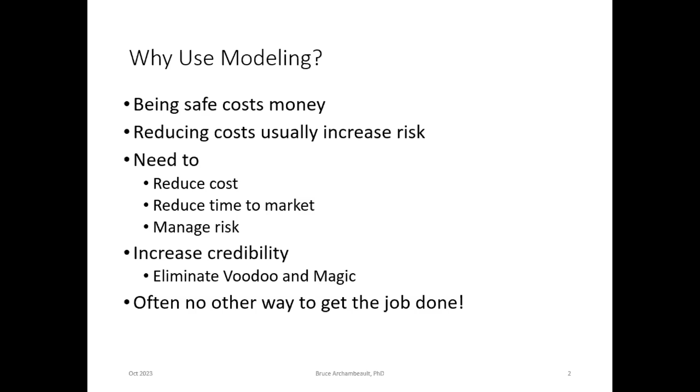Each tool is based on some modeling technique. And the modeling technique basically solves Maxwell's equations. And the way they do it varies. And that means the ability of the tool to model everything is impossible. Some tools are really good at long wires. Some tools are really bad with long wires. Some tools are good with shielding. Some tools are bad with shielding. So we're going to go through and talk about some of the different modeling techniques here in a moment.

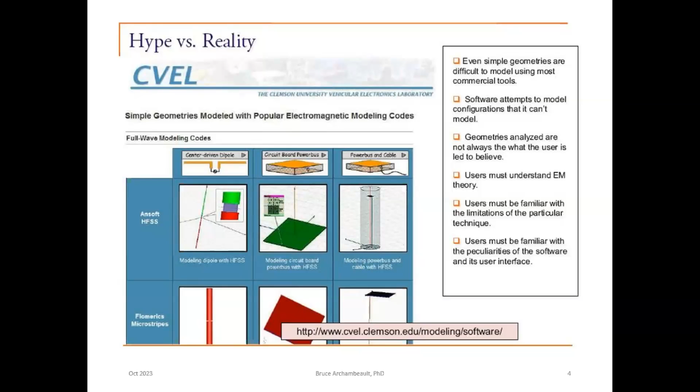So modeling is here now, and I think that if you go to the symposium, the EMC Symposium, you'll find multiple sessions on just modeling, as well as problems that have been solved by using modeling. But they can't do everything. The CAD file has too much information to be able to model everything. So you can't just download a mechanical CAD file and an electrical CAD file and hit the button and say, go model. You have to break it down into what problem you're really trying to solve.

And the old saying about garbage in gives you garbage out applies to simulations like it applies to most things. So you have to be very careful in what you're simulating. But modeling can do some things. It can eliminate using out-of-context equations. It can help you update rules of thumb.

It's particularly good at looking at a design feature and doing a what-if analysis. What if I make this longer? What if I move it to here? What if I make the holes in the shield larger, but the metal thicker? All those kinds of things can be solved. And basically, the individual problems can be combined to find the overall result.

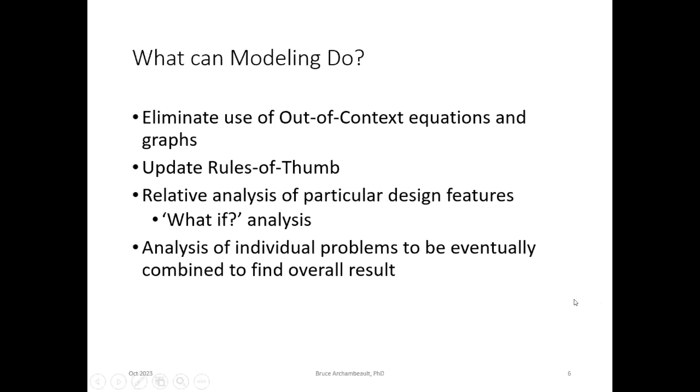But as I said earlier, there's no one modeling technique that'll do everything. And so remember what the vendor's goal is. The vendor's primary goal is not to solve your problem, it's to sell software. So you have to be careful with what they claim or what they don't say. And that's why I think it's important to understand how the simulation tools work. So there's a variety of modeling techniques. I'll talk a little bit about quasi-static tools that just do inductance, capacitance, and resistance extraction. But I'm going to focus mostly on full wave techniques.

And I put magic in here because I actually had a vendor once, when I asked them how their software worked, tell me that it was proprietary and they couldn't tell me. Well, Maxwell's equations are not proprietary. And as far as I'm concerned, if they can't tell me how it works, I won't know when it doesn't work. And so I have no patience for anybody who won't tell me how the software works.

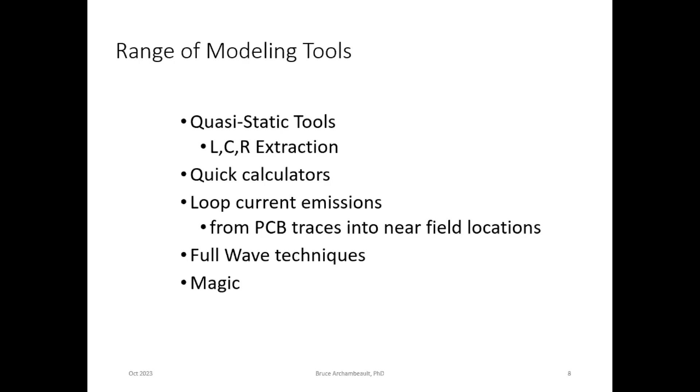So quasi-static models are typically for very small elements, usually a 20th of a wavelength. It helps you make a lumped circuit approximation. And as I said earlier, it's good for LRC extraction. Usually used in signal integrity tools, but it can be used in simulation tools as well for EMC. The problem is less complex, so the equations are less complex and give you an answer quickly. But the key is it has to be small compared to a wavelength.

It assumes that there's no propagation delay, which is not true, of course. But if you have parts that are very close together, much less than a wavelength, very small, then these LRC extraction tools are very useful. So the quasi-static simplified equations give you more efficient codes, so you get answers faster. That's really what it comes down to. They're usually written to complement a circuit modeling tool such as SPICE or something similar to that.

But it has its disadvantages, like all the simulation tools do. It is important that you ensure the problem meets the criteria for a quasi-static solution. That is, all the dimensions must be electrically small because it's assumed that there's no propagation delay. And this is becoming very difficult with the frequencies of concern getting higher and higher. For example, for a 3-centimeter backplane high-speed connector, quasi-static is only accurate to less than about 5 gigahertz. So you can imagine at 30 centimeters that it's going to be accurate only to 500 megahertz or so.

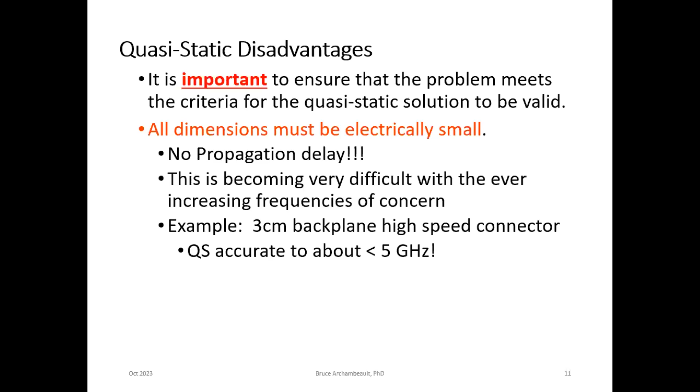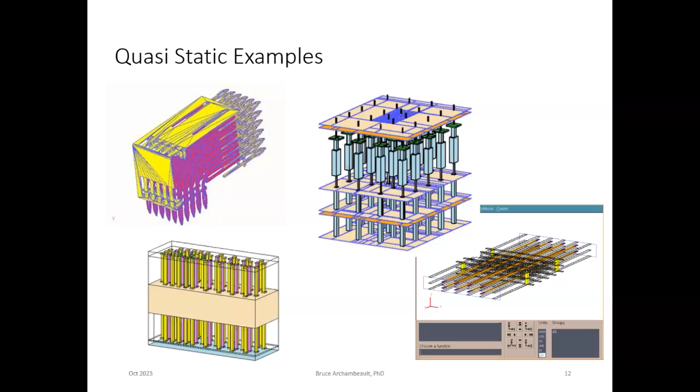So here's some examples of some quasi-static models that I've seen in the past. They're all connectors, and you can see how the parts are very close together. And at the frequencies that were being simulated, these were very small compared to wavelength.

Now, there's a number of different modeling techniques: the finite difference time domain, the method of moments, the partial element equivalent circuit technique, transmission line method, and finite element method. And there are others, but they tend to be university graduate students' tools and don't get propagated out to people. I'm going to focus on the most popular ones, which is FDTD, the method of moments, and the finite element method.

Now, the good news is you don't need a PhD to use them. You can get codes from many places. You can get them free from universities, but the buyer has to be aware, or the user has to be aware, because this was developed by a graduate student, and the primary goal of that graduate student was to graduate, and they're gone. And so there's probably no manual, or the manual is very weak. So you have to be very careful.

You can purchase the software, of course, which is what most people do. But again, the user has to be careful to make sure that the simulation technique will do the kind of problems that they want. So I think that users need to understand the basic techniques and their limitations. Each technique has an area where it excels, and areas where it has limitations. So oftentimes different modeling tasks are going to require different modeling techniques.

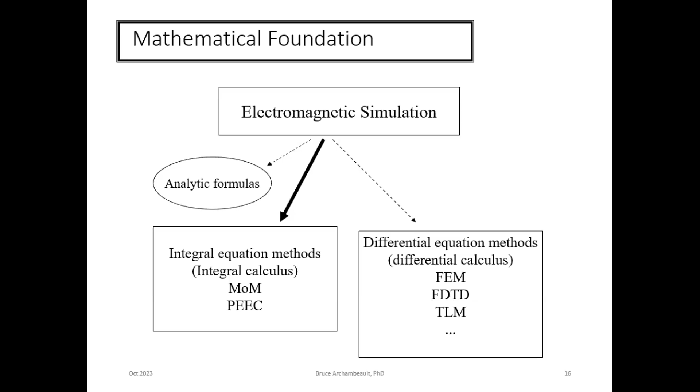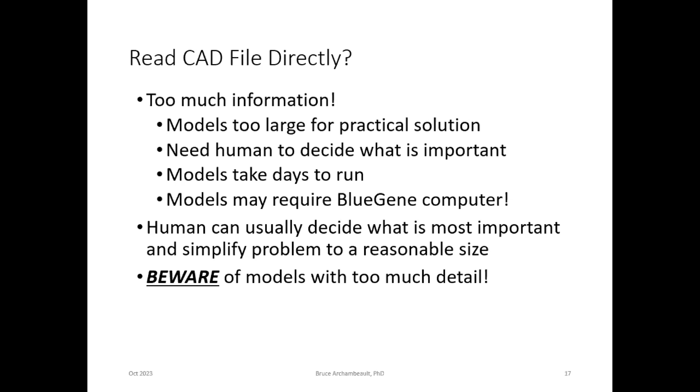So a lot of tools will read a CAD file, and I'm very nervous about that because there's too much information. And so the models tend to become very large for a practical solution. So the human, the engineer, needs to decide what's important. Sometimes models can take days to run. If there's too much information, you might need something like a Blue Gene computer or some kind of supercomputer to run it, which is not practical for most of us. The human needs to decide what's the most important and simplify the problem down to a reasonable size. You need to be careful about models that have too much detail.

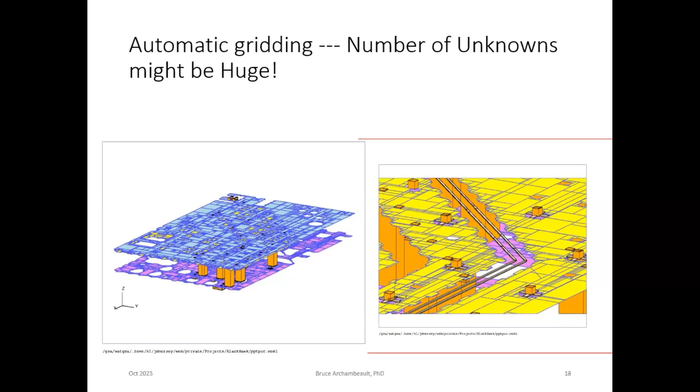But when you look at it, you can probably simplify some of the things easily enough. The reference plane that's on the side of the differential traces has, I don't know, protrusions in it. That may or may not be important. You could always run two models, one with the larger size and then the smaller size. And if it's not much different, then you've got a good answer.

All right, the finite difference time domain technique is a simple technique. You have to grid up all of the space, and the fields are assumed to be constant over a cell. So imagine a room that you wanted to simulate something in. You would make all these little square boxes that fill up the room. Each box has to be denoted as air or metal or dielectric or some kind of magnetic material. And it's a time domain technique, which means that you get a wide band of frequencies all at once. And then you can get frequency domain just by doing an FFT.

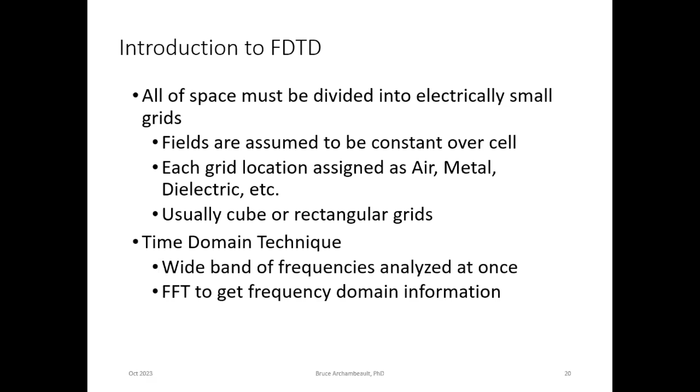So Maxwell's equations in differential form look like this. We're not going to spend a lot of time on Maxwell's equations, but basically on the left-hand side, in one dimension, it's saying that there's a difference in the electric or the magnetic fields across a small area of space. By the way, when I say small, I always mean smaller than a wavelength. And for EMC purposes, 1/10 of a wavelength is usually good enough. And that's equal to a time varying change in the electric or magnetic flux. The J term is conduction current. So in the air, we don't have any conduction current unless we have lightning or something.

By the way, the minus sign that's on the lower equation means that the wave will propagate, and light is just an electromagnetic wave. So you can tell your significant other that without the minus sign in Maxwell's equations, you couldn't see anything because it would be dark. And they'll be quite convinced that you're a nerd.

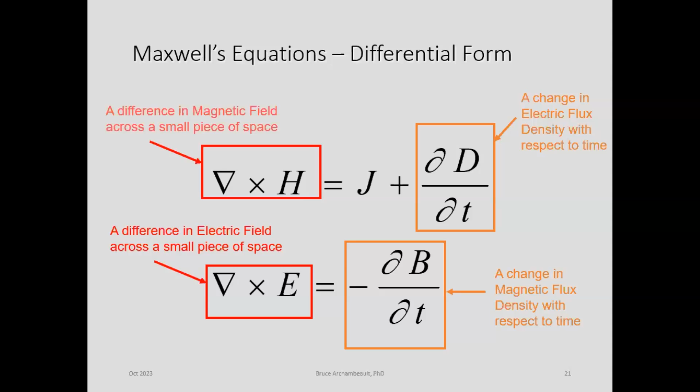Well, we take the equation and we convert it to central difference. So basically the lower equation is saying at a certain time, the change in the field from one cell to another cell over the size of the cell is equal to the change in time of the magnetic field over the delta time. And of course, we have to put in the constants, in this case mu, to make all the units come out right.

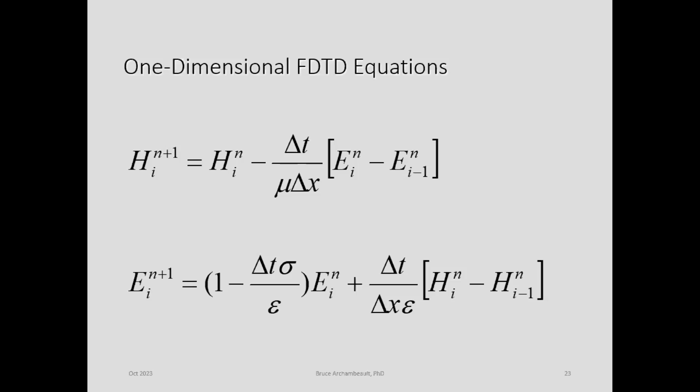And so here's the two equations for FDTD. And basically, it's just time stepping. So you've got a bunch of cells, and you go through and calculate the electric field for each cell. And for each cell, the electric field is based on the old electric field and the difference in the magnetic fields on either side of it.

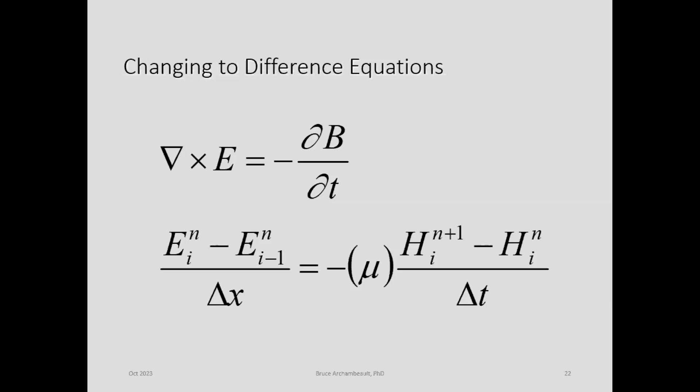So coming back here, if I was to rearrange the lower equation, then looking at H at n plus 1, that's the new time. So the old H, which is H superscript n, is going to be on the other side of the equation. And on the E field the i's are changing, so that's position. So on either side of the cell we're calculating, we're finding the difference in the E field and the old H field, and that gives us the new H field. So this just says the same thing I just said.

So in 1 dimension, you can see the E fields are shown there, and the H fields are in between the E fields. They would normally be a cell, but I'm just showing a line here. And basically, you set a source, and the source then finds the H fields on either side of it, and the H fields on either side of it are going to be due to the old H field and a difference in the E fields, and so forth. And that just marches on.

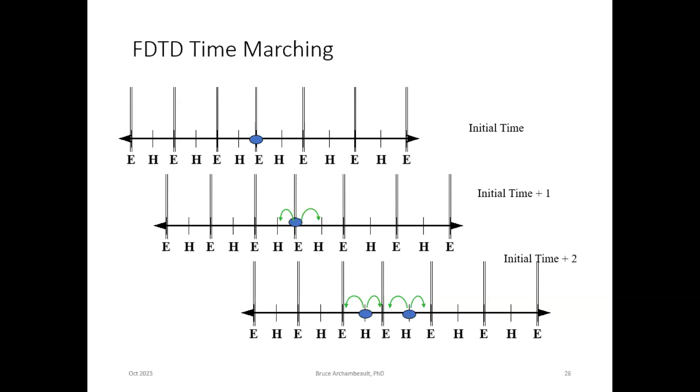And so computers are really good at this, because this is really nothing more than accounting and counting. So we find the E fields everywhere, then we go back and find the H fields everywhere, and then we're done. Eventually, we have to make time go on, and then when everything is done, we've finally got the answer.

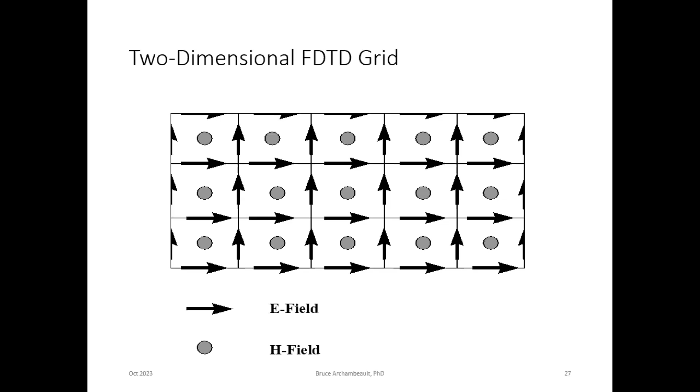A two-dimensional grid adds an extra E field in this case. So an H field, one of the dots, is equal to the old H field and the difference in the E fields on either side of it, as well as above and below it. And you just go through and find the E fields everywhere, and then find the H fields everywhere, increment time, and go on. So for two-dimensional FDTD, you can use either two electric fields or two magnetic fields.

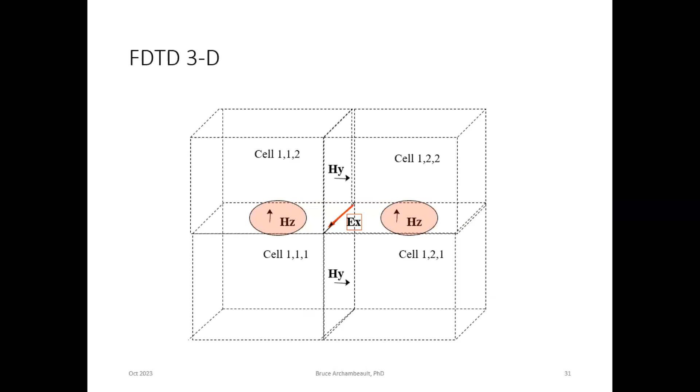And finally, the three-dimensional grid, which is what we really work with: the E fields are along the cell's edges, and the H fields are in the planes. And so if I wanted to find EX, for example, in the place it's highlighted in red, I'm going to take the old EX and the difference in the HZ fields on either side of it, and the difference in the HY fields on either side of it.

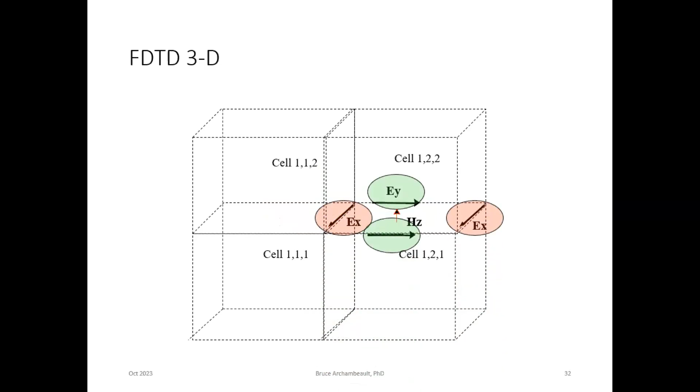And if I wanted to find HZ, it's going to be equal to the old HZ and the difference in EX on either side of it, and the difference in EY on either side of it. And again, we just march through, find all the EXs, then all the EYs, and all the EZs, and then all the HXs, HYs, and HZs. And then we do it again with time incremented.

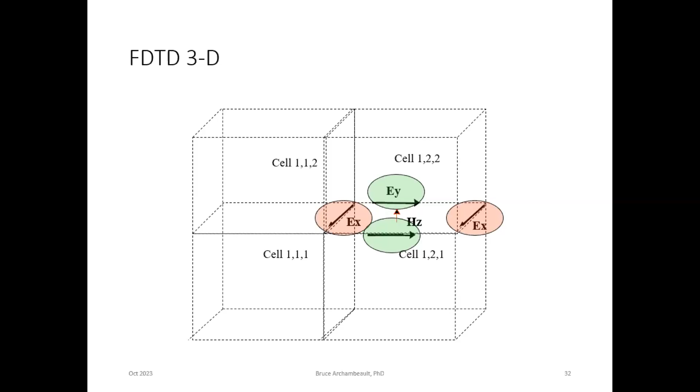So as I said earlier, we have to assign each cell as either a perfect electrical conductor, some sort of metal, a dielectric, or a magnetic material. So we have to know epsilon, mu, and sigma. FDTD will give you outputs. Basically, they're perfect receive antennas. They receive both the E and the H fields no matter what direction they're coming from. And the X, Y, and Z components are found individually as well.

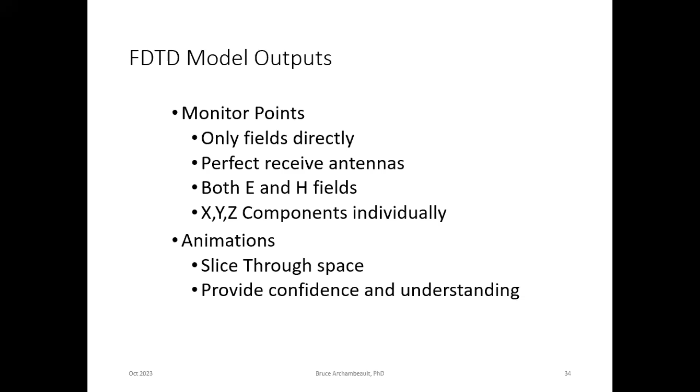The nice thing about FDTD is that you can get animations. Since it's a time domain simulation, you can see how the fields are propagating through your model. And that gives you a lot of insight into whether or not the model's working right.

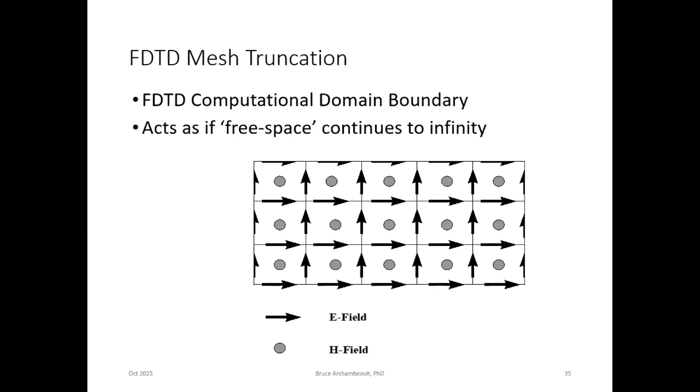We have to be able to stop the mesh at some point. And basically there are different kinds of techniques that allow us to find the fields at the boundaries. Most of them require far field conditions, so the impedance of the E and H fields is well known in the far field. Basically 120 pi, or 377.

So there's also something called the perfectly matched layer, which basically adds more cells. So if I have a computational domain that's, say, 100 cells by 100 cells by 100 cells, I'm going to add, for the perfectly matched layer, some number of cells. And I've heard numbers from vendors of 8 and 16. The more cells you do, the more accurate it is.

And it works very similar to the absorbing material in an anechoic room. It basically has loss in these extra cells, and losses both in the E and the H field. So by the time it gets to the end, it's all gone.

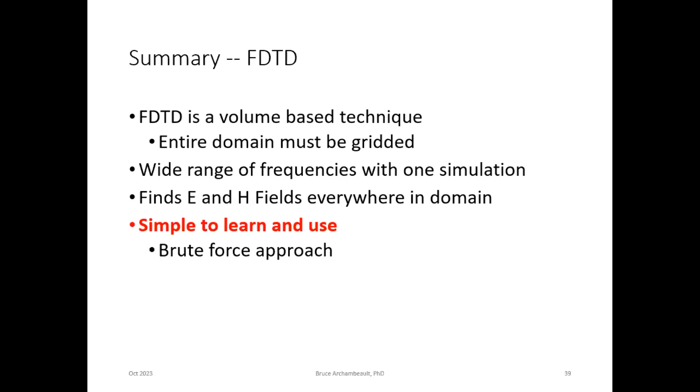So basically, FDTD is a volume-based technique where all the domain has to be gridded up. You get a wide range of frequencies with one simulation. You find the E and the H fields everywhere, and it's very simple to learn and use. It's kind of a brute force approach. It's probably not very elegant, but it works really well. And when you're just starting out with modeling, oftentimes FDTD is the choice because it's so simple to use and simple to know when you're making a mistake.

So it's very well suited to shielding problems with dielectrics and lossy materials, because we're defining epsilon and mu. It allows infinite planes, so you can run a metal plane right up into the boundary condition, and there's no leakage around the plane.

It's not well suited to problems with long wires because I have to have a lot of what they call white cells around it for the boundary conditions to work properly. And it's very sensitive to resonances. So it's very good for shielding. It's not so good for long wires.

Okay, the method of moments is next. We're going to break all the surfaces into electrically small patches, and the wires get broken into small segments. And basically, these small patches and segments are small compared to a wavelength. Again, 1/10 of a wavelength is usually good. Method of moments is a frequency domain technique, so you have to run the model for each harmonic frequency.

Oftentimes, if you have a tool that does method of moments, it's going to allow you to set a start and stop frequency and a step size in frequency. And so you don't have to literally go and run it for each frequency that you want.

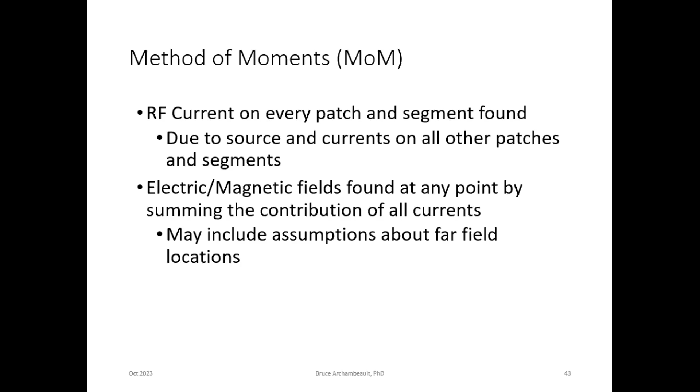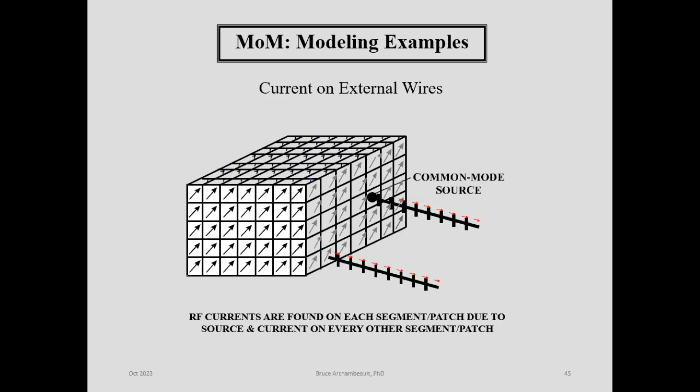So an example here is a shielded box with some wires coming out of it, and the source is labeled there as common mode source, that we're driving one of the wires, and the little arrows denote the currents on the box and on the wires. And so the fields are going to be found by summing the contribution of all the different cells or patches to one observation point, and then you know what the answer is at that point.

And so it's not as accurate as reality. The piecewise sinusoidal is a bunch of sine waves that you put together, and now I've got a nice smoothly varying current. But of course, the more complicated the basis function is, the more it costs in calculation time and memory.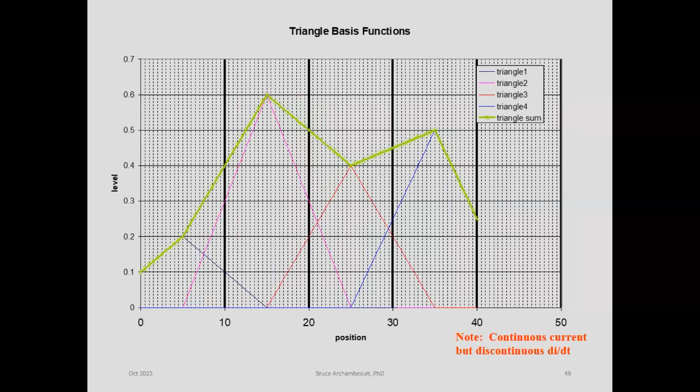Okay, I kind of showed this already. I'm just showing the individuals.

So as I said, the simplest basis function just needs one calculation per grid, but you need more grids per wavelength to correctly estimate the currents. The more complex basis functions require more calculations per grid, but less grids per wavelength. So it's a trade-off. Usually you don't get to pick. Usually the vendor has decided what they think is the best, and you have no choice but to go with what they have.

So the method of moments is a surface-based technique, frequency domain. So the simulation has to be repeated for each harmonic frequency. The currents are found everywhere on all the patches and wire segments, and then the fields are found from those currents. It's very good for wire and surface structures, and it's simple to learn and use, just like FDTD.

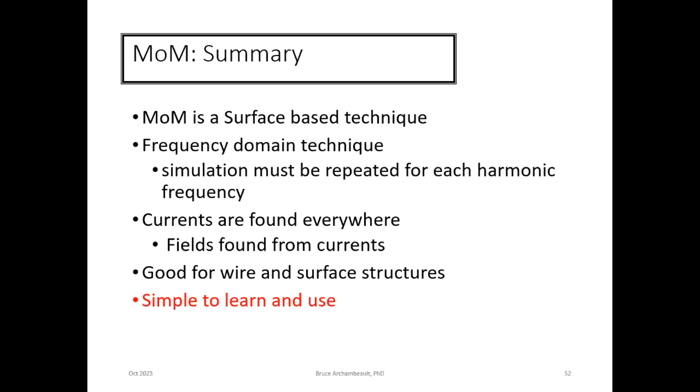It's very well suited to problems with long wires because there's no white space required. It's even well suited to problems with large distances. If I wanted to use FDTD and do a simulation that goes out 10 meters, I've got to make all that area in between the receive antenna and the EUT as cells. So that's a lot of empty cells for nothing. So large distances is problematic with FDTD, but with the method of moments, it's just a simple equation that you put the distance into,

and it's very straightforward. But it's not suited to problems with shielding or dielectrics or lossy materials. You can force it to do these things, but it takes kind of an expert user.

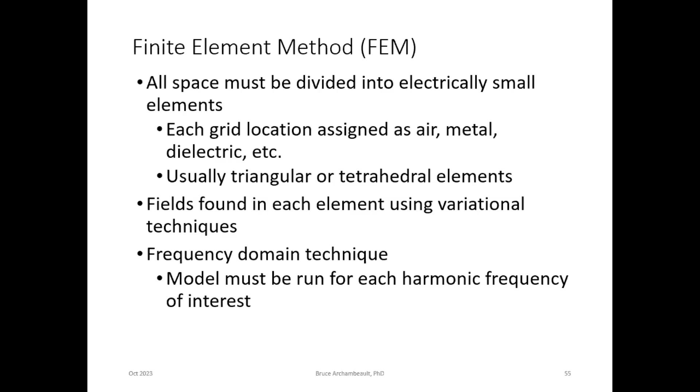And finally, for the modeling techniques, the finite element method, again, it's a volume-based method, so all the space has to be divided to electrically small elements. You define the grid location as air, metal, dielectric. Usually they use triangular tetrahedral elements, and the fields are found in each element using variational techniques, which I'm not going to get into too much here. Just like the method of moments, it's a frequency domain technique, so we have to run the model for each harmonic frequency we're interested in.

But it's good for problems with irregular geometries or curved surfaces and so forth. It can handle different materials very well, and it results in what's called a sparse matrix, which can be solved very efficiently with efficient storage. So the method of moments creates a very full matrix. The finite element method creates a sparse matrix.

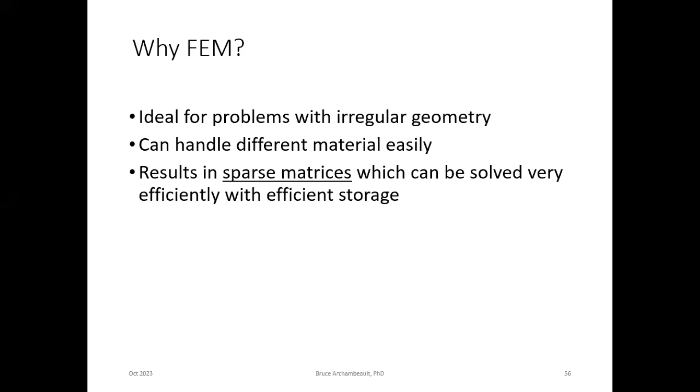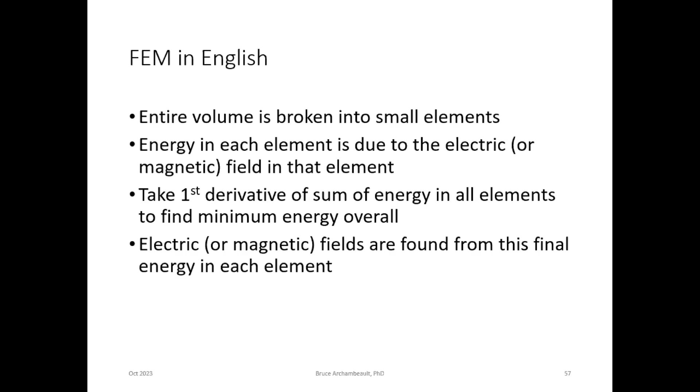So basically the way the FEM works is the entire volume is broken into small elements, as I said. The energy in each element is found due to the electric or magnetic field in an element. And then they take the first derivative of the sum of the energy in all the elements to find the minimum energy overall. And once you find that, you have the correct solution. And this is all done by the computer, of course. And then once you know what the currents are on each of the triangular cells, you can find the electric and magnetic fields.

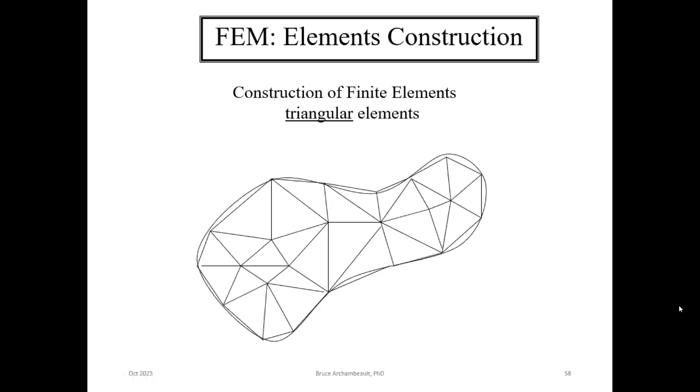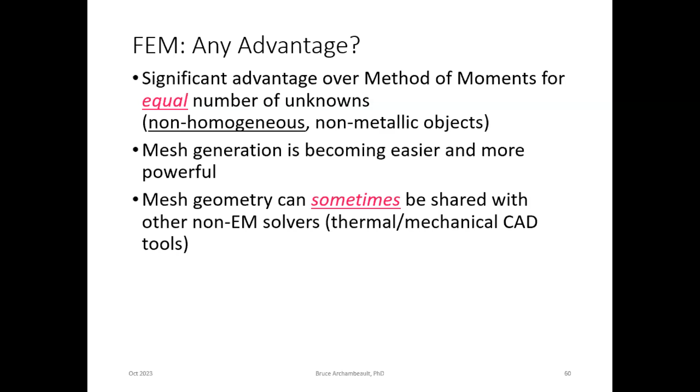The mesh generation, you can't do that by hand. It's too complicated. But there are tools usually built into the finite element simulation tool that do the meshing for you. And sometimes you can share the geometry with non-EM solvers, but I've yet to see that done successfully.

So again, finite element method is a volume-based technique where the entire domain has to be meshed. It's frequency domain, so that means a single simulation for one frequency. Time domain finite element method is not widely available. I know it's at universities, and I heard that there was a vendor that was selling it, but I haven't seen it actually work.

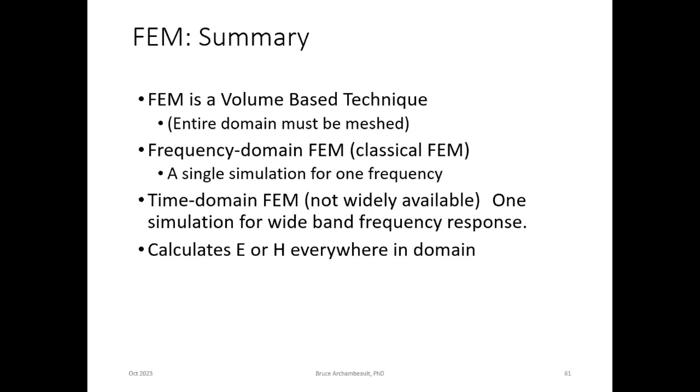So it's very well suited to bound problems like waveguides, resonant cavities, and so forth, and very well suited to problems with large size differences within the model. For example, a microstrip that's only 10 mils above the ground plane, but you want to find the fields inside a box or something, and the 10 mils requires very small cells, but you can make them larger as long as they're still small compared to a wavelength.

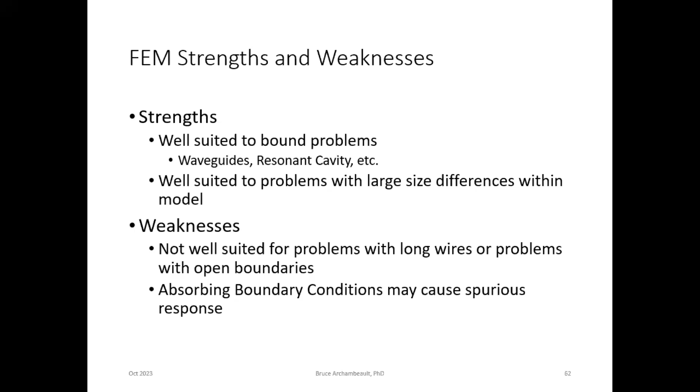Just like FDTD is not well suited to problems with long wires, it's not well suited to problems with open boundaries. That's why I say it's good for bound problems like waveguides and cavities. There's been problems in the past with the absorbing boundary conditions giving wrong errors. And so oftentimes you have to do two models with different size computational domains to make sure you're not getting an answer that's dependent on the boundary.

Okay, and I could talk for 4 hours on model validation. It's something that most people don't do, and that's a mistake. There are 3 different levels of validation. Basically, does the modeling technique work? You know, finite difference time domain, does that work? Yes, it works. The second level is the vendor implementation. Did they do the coding right? Hopefully they've tested it, and hopefully they did it right. But the most important to an engineer is this specific model.

How do you know you get the right answer? Just because the tool gave you an answer doesn't make it right. And so some other approach has to be done to validate the simulation. So if you have a very complicated model, it becomes very difficult to validate. You have to be careful about measurement comparison. If we're talking about an EMC semi-anechoic room, it could be plus or minus 7 dB because of the possible errors in the room itself, in the receiver, the antenna as it goes up and down the mast changes or can change by as much as 4 dB.

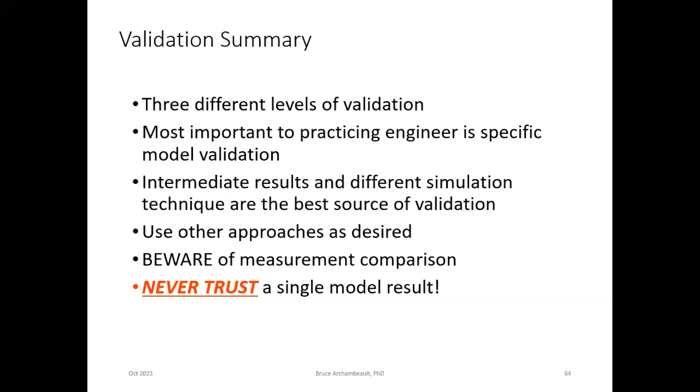If you've never, ever made a mistake in your life, then you can do away with validation. But I'll tell you what, I've learned more things by doing a model wrong than I have done by doing a model right. So you'd never trust just a single model result. And this isn't a religion, so it's not sufficient to simply believe that the result's correct. And the fact that you ran a simulation on some other model and you validated it doesn't guarantee the results from the new model. And as I said, garbage in gives you garbage out. You need to understand the physics of the problem and understand the limitations of the modeling technique and the software tools.

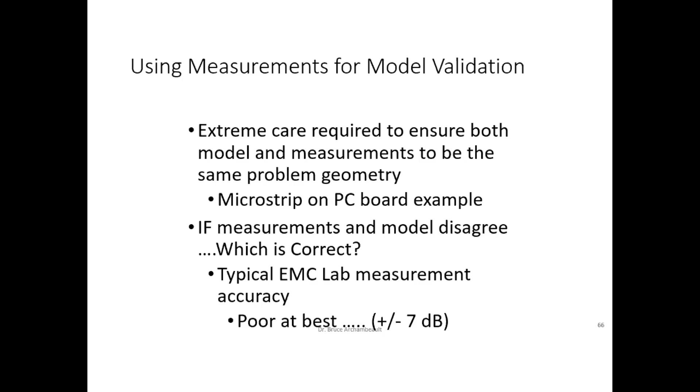So where to go for more information? Well, there's lots of different websites. I have a few on the next slide, I think. There is a book, the EMI/EMC Computational Modeling Handbook. This is one that I was co-author on. And it covers different modeling techniques. It covers validation. And it covers the strengths and weaknesses of each technique. I think it's really important to understand that each technique has strengths, but each technique also has weaknesses. There's no one modeling tool that'll do everything.

You can certainly go to conferences and learn. The IEEE EMC Society's conference always has a tutorial on modeling techniques, how they work, and so forth. Seminars such as this one. As I said, this topic and just a validation topic could be hours. To really cover the topic of modeling, it would actually take a day. There is an IEEE standard that talks about validation. So here's a couple of websites that you can go to.